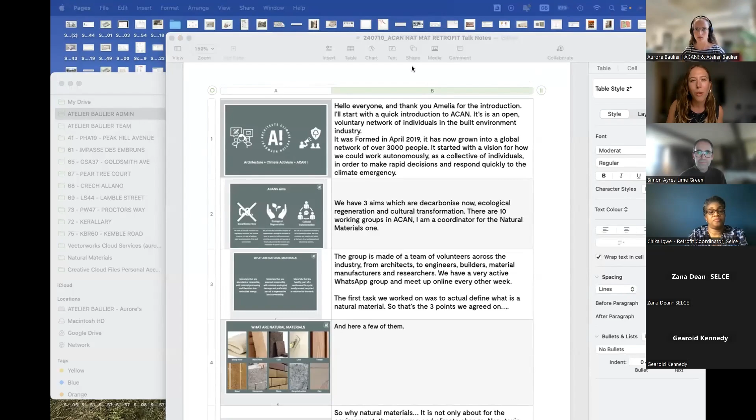Thank you so much, Aurore. Thank you. Okay, let me share. Okay, so here we go. Yes, you can all see this. Yeah. Okay, hello everyone. Thank you, Amelia. Aurore, sorry, just to let you know, you're sharing the widescreen and not the full screen one at the moment. No. Okay, let's try again. Sorry. That's all right. Is that working now? Perfect, yeah. Sorry about that. Okay, thank you, Amelia. And thank you everyone for joining us tonight.

So I'll start with a quick introduction to ACAN, which stands for Architects Climate Action Network. It is an open voluntary network of individuals in the built environment industry. It was formed in April 2019 and has now grown into a global network of over 3,000 people. And it started with a vision for how we could work autonomously as a collective of individuals in order to make rapid decisions and respond quickly to the climate emergency. We have 3 aims, which are decarbonize now, ecological regeneration, and cultural transformation.

There are 10 working groups in ACAN, and I'm a coordinator for the natural materials group. Our group is made of a team of volunteers from across industry, from architects to engineers, builders, material manufacturers, suppliers, researchers, and some homeowners as well. So we have a very active WhatsApp group with a lot of information being shared in there, and we're meeting up online every other week.

The first task we actually embarked on was to define what natural materials are, sometimes so-called bio-based materials. So those are the 3 lines we came up with. Natural materials are materials that are abundant or renewable with minimal processing and therefore low embodied energy. Materials that are also sourced responsibly with minimal ecological damage and preferably part of a regenerative land stewardship. And finally, materials that are healthy, part of a continuous life cycle, easily reused, recycled, or returned to the earth.

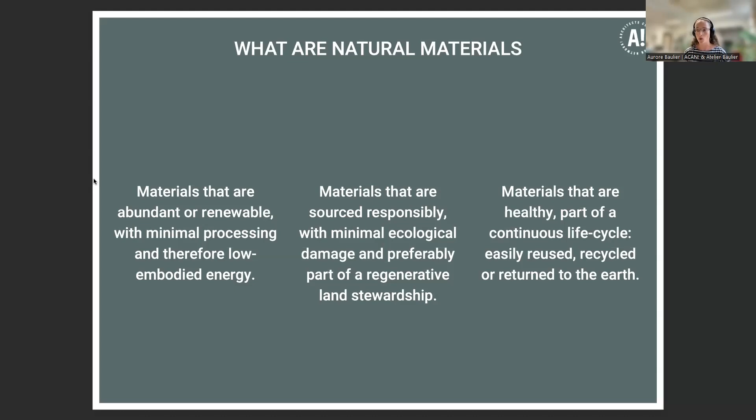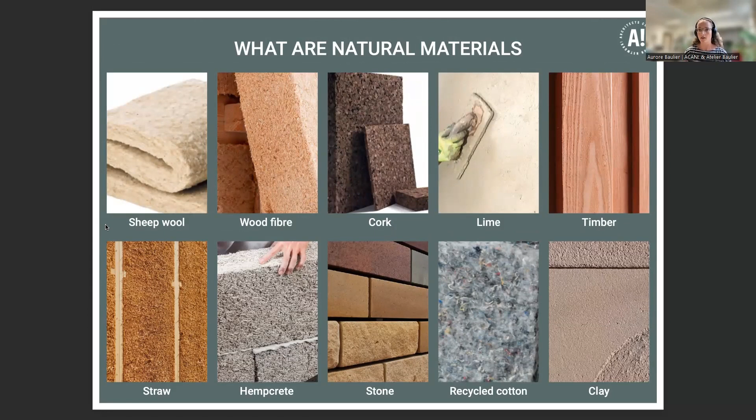And here you can see a few of them. Some of them might be obvious to you, so wool, timber, but also stone and clay and cork and straw you can see here on the bottom left. So why natural materials? It's not just about the environment, the use of the resource and climate change. Non-toxic materials are also beneficial to everyone along the chain, from the extraction to the manufacturing, installers, occupants of the building, and eventually the people who will be in charge of dismantling a building.

Health issues associated with the presence of harmful chemicals in our built environment have now been clearly identified. Some are called, for example, VOCs, the volatile organic compounds, and it has been demonstrated that the chemical presence in dwellings can actually impact the health of the inhabitants. It can be chemicals in vinyl floors that can impact people's hormones, but also generate respiratory issues.

So understanding the carbon cycle is key to bio-based materials. This illustration here shows you the different phases. Start with carbon storage. When a plant grows, it soaks up the CO2 from the environment and stores it inside. So when they are harvested to build a building, this carbon is sequestered until the end of life. And using those materials can also contribute to regenerative land management if attention is paid to where they come from and how they've been grown, which increases the carbon capture in soil and forest.

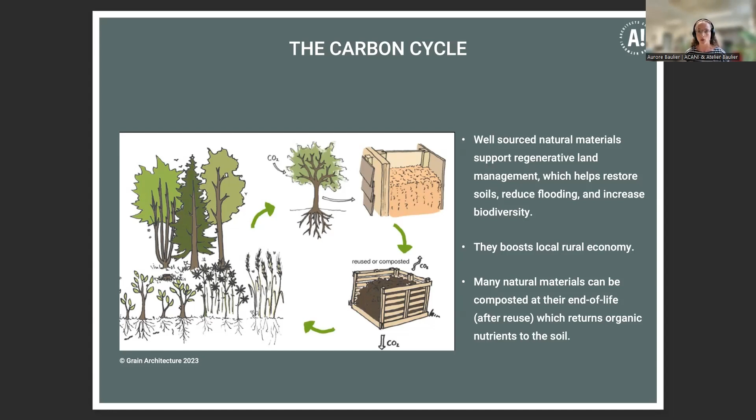It is also important to consider the end of life of a building when designing. Waste is a huge issue in the construction industry, and therefore the choice of material is key. For example, natural timber and wood fiber insulation can be composted, which helps return CO2 and nutrients to the soil, feeding new growth and completing the material cycle.

Here we have the illustration of the carbon footprint of various insulation materials. At the top of the graph, going towards the right, you've got material that requires a lot of processing and extraction to be made. So they are basically petroleum-based and mineral-based insulation, the one commonly seen on site like expanded foam materials. And then at the bottom of the graph, you see the little line going the other way. That's where carbon is being stored.

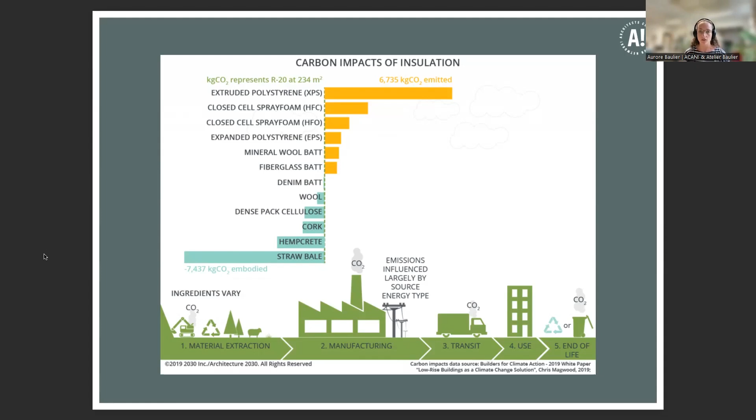Straw, for example, is brilliant, and hemp the same way, because they are plants that grow really fast and you can harvest every year in the same field, potentially, and store the carbon in buildings. It's worth noting as well that PIR, which is like plastic foam, and other petroleum-based and plastic-based materials usually end up being incinerated at the end of their life or in landfill, releasing pollutants into the environment.

Looking now at retrofitting. This is a house most of you would be quite familiar with, a solid masonry house in the UK, solid bricks. It's worth noting that all building materials before the 20th century were actually natural materials and were vapor open, relying on drafts for the ventilation, keeping the building fabric healthy. And this is why when we're retrofitting, it is crucial to incorporate mechanical ventilation as part of the retrofit.

Retrofit plays a huge part in improving the performance of our buildings. However, we need to take into account the fact that our buildings were built not to have any insulation, so we need to understand that to make sure we're not doing anything detrimental to the building fabric. And natural materials work really well with old buildings because they have that flexibility and they are vapor open. That means that they are compatible with the building fabric and don't generate any damage to the existing building.

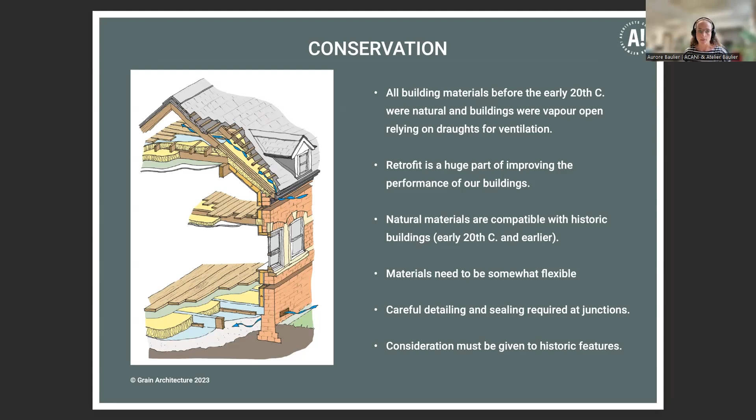Here on this graph, running really quickly into moisture. So back to when we talk about indoor quality and health, actually moisture has got a big part to play. Most of you would probably think that moisture control in a building is actually about keeping rain outside. However, this illustration here on the left shows that moisture is being generated inside the building as well. It's commonly agreed that each household generates about 7 liters of water per day. That is from breathing, laundry, boiling water for pasta, a cup of tea, whatever.

The graph on the right shows that there is actually an optimum relative humidity level that should be kept in a building to prevent health issues. And so managing moisture is a very important element. It's typically done via ventilation extraction. However, the choice of materials in your building will also have an impact, and I'm going to show you how

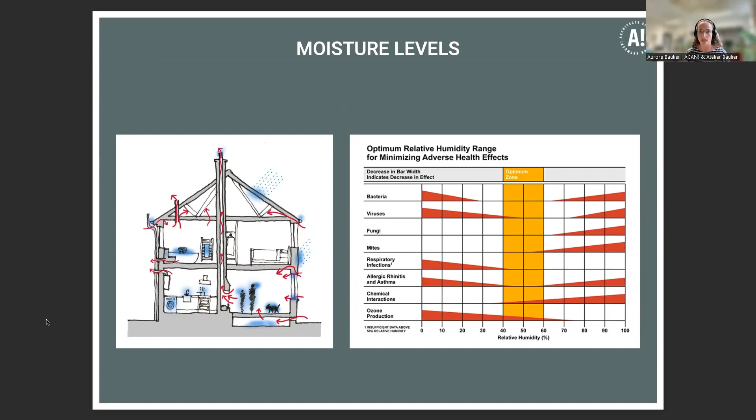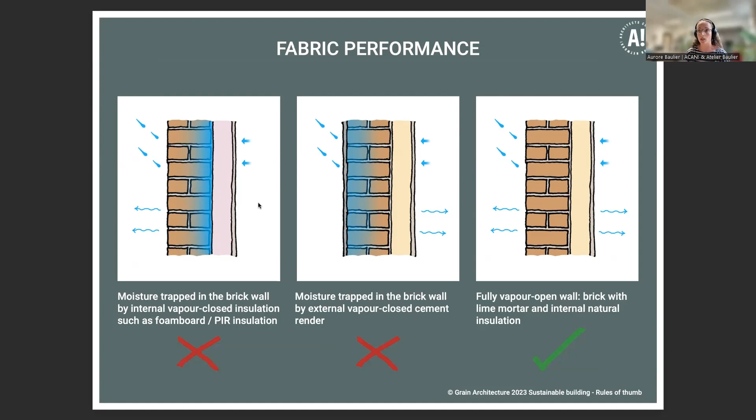So as you can see on the 2 drawings on the left, the vapor closed materials such as cement, plastic insulation, or plastic paint—it's worth noting that most internal emulsion paints are made up of 35% plastic, and exterior ones can be up to 75% plastic—those materials actually trap the moisture inside, creating issues for the building fabric, which will deteriorate over time.

So this page shows a comparison between 2 retrofits of a typical masonry wall in a house, one using conventional materials and the other one using natural materials. You can see that using natural materials doesn't mean good detailing isn't required. You can see here that all the reveals around the windows have been insulated and vapor membrane taped, and you have a continuity of the insulation. Things well done with suitable materials and a building well ventilated will ensure the longevity of the building and create a healthy, comfortable, and damp-free indoor environment.

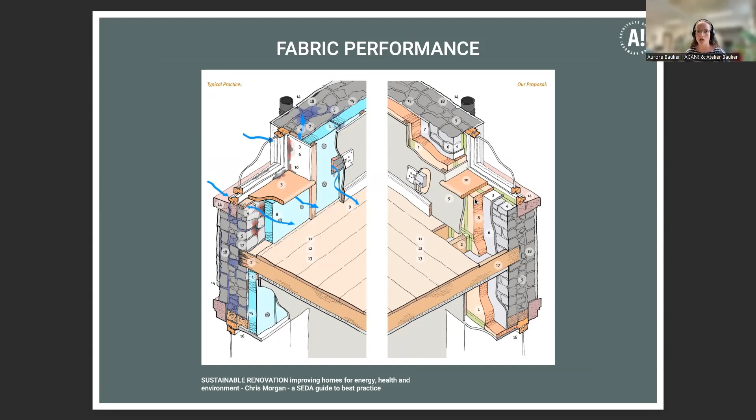And as you can see here, plastic and vapor-closed materials will tend to encourage condensation and trap moisture within the fabric. This is where we see mold growing. Drafts and thermal bridging will also create cold surfaces internally, which again will foster condensation. And when we look at insulation such as PIR, the rigid plastic foams, these materials actually shrink over time. This means you will end up having gaps around the edges, forming thermal bypasses. So slightly springy natural materials such as hemp or wood fiber, snugly fitted between studs, won't move and will provide a durable insulation solution.

So now looking at a key graph that was released earlier in the year by the ASBP, the Alliance for Sustainable Building Products, which is about how much insulation you should aim for. This actually depends on your house, but Part L of the building regulations outlines a target of 0.30 watts per square meter Kelvin U value. It's a bit technical, but basically they say that we should target this line here, but there is an allowable zone that is actually at 0.70.

And when we look at the graph on the left, you see the non-insulated wall, and the minute you add 20 mil of wall insulation, the performance has doubled. The sweet spot seems to be about 60 mil, where you've got a good compromise between the performance of your wall and minimizing the risk of condensation on your existing masonry wall, which automatically becomes a bit colder on the other side of the insulation. It's worth noting that at 60 mil of insulation, you've reached 90% of the performance given by the target. And it is said that at about 40 millimeters of insulation, you save about 80% on your heating bills.

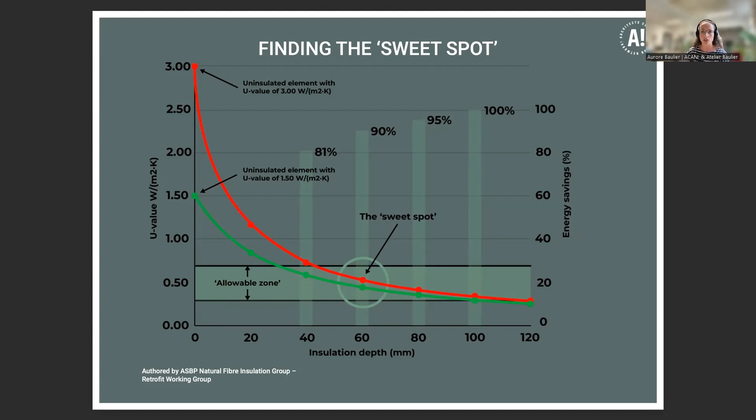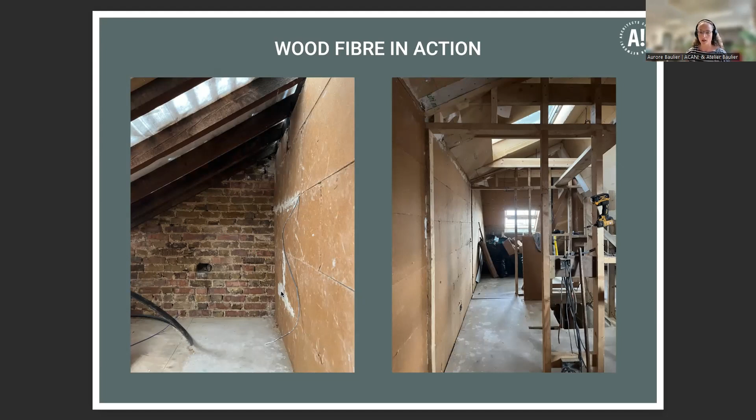Right, I tried to make that introduction quite brief, but I think it's really important to understand how and why using natural materials can help tackle the climate crisis and help being in control of our energy bills while improving the quality of our buildings. That is a project of mine that is on site at the minute, where we're insulating internally with wood fiber panels that would be rendered over with lime plaster supplied by Simon, actually.

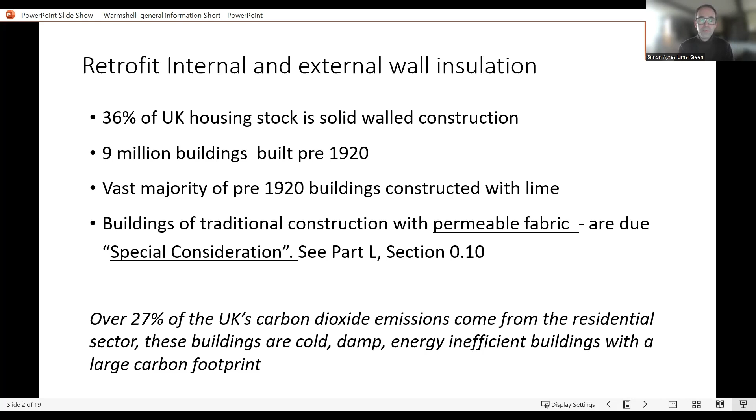so the ones we've just been learning about, the natural materials. Irrespective of whether you think natural materials are good for you because of low VOCs and all the other things, they are also technically the right thing according to the government's best practice guide and Part L for dealing with those solid wall buildings. And as it says there's an awful lot of carbon dioxide emitted from those buildings, and as many of you probably know, they are cold and damp and difficult to heat.

So going on to a little bit more of the nuts and bolts of designing internal and external wall insulation. Obviously, if you can fit external insulation, it's a better thing. External insulation goes on the outside of your walls and envelops the house like a tea cozy, and thereby gives you a better thermal performance for the same thickness of insulation, because you have fewer thermal bridges. I'll come on to that in a moment.

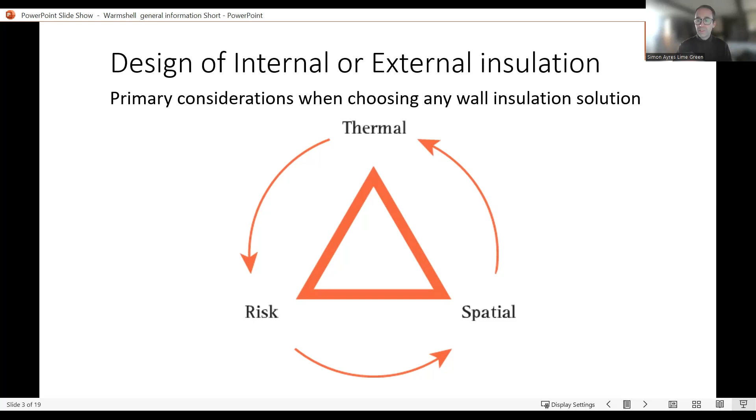So you've got to weigh up different things when deciding which one to do. Thermal performance obviously is important. How much space you're going to lose inside or out, how much space can you use? And then particularly with internal insulation, the risks, and the risks are principally to do with moisture. As we've just been learning, where does the moisture come from? Does the insulation material we are using trap it, or does it allow it to breathe out? So there are the three guiding principles.

So why insulate externally? I'm doing this in reverse, so excuse me. It's technically superior. Thermal bridges are the bits of wall which are difficult to insulate and which you can lose heat through. So it might be if your neighbour isn't insulated and you're semi-detached, it might be leaking a bit of heat through the join with your neighbour.

Another reason why external insulation is good for some people is because there's no loss of space on the inside. It also lowers the condensation risk or the moisture within the wall. That's because you've kind of got a new weatherproof front over your building. So if you've got an old building that needs improved protection against the weather, it offers a good thing.

Though it can be difficult to do because the building might be listed, or it might be in a conservation area, or there might be complex detailing. So you might have bay windows, decorative brickwork that you might want to keep, other features which make it difficult to add in external insulation, window sills, and so on and so forth. All those sort of things might be difficult to overcome.

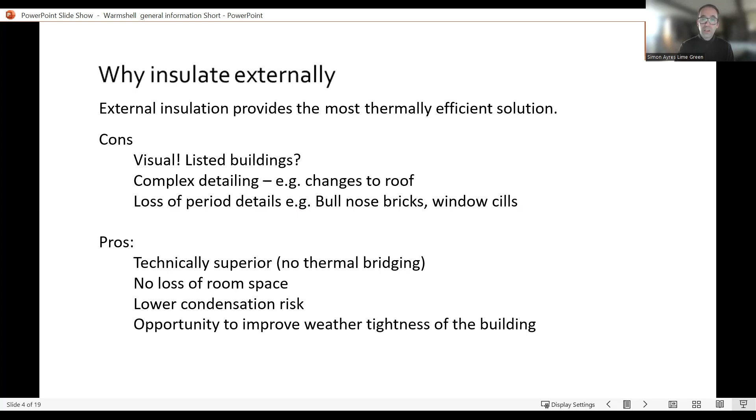Insulating internally, I'm going to do it in reverse again. So obviously you get to keep the external appearance of the property. It's generally a bit cheaper. And also that can be cheaper, and you can do it piecemeal, so you can do it room by room, whereas external you need to kind of do at least one elevation at a time.

There are, this might be slightly controversial, fewer specialist skills perhaps, because externally you need more people on site, more labour to do rendering in one swoop, so you get the whole thing done in one go. Whereas internally, you can be a little bit more piecemeal. You can have one or two people rather than a whole team.

Problems with internal insulation. Again, you've got detailing. So have you got decorative mouldings? Is it a Victorian property with decorative mouldings that you want to keep? Is the building made up of lots of additions over time, which make junctions difficult, that sort of thing? It's definitely riskier from a condensation point of view. So water vapour, as it goes through the wall, will condense and turn to liquid water. That liquid water is not a good thing around timber that will be embedded in the wall.

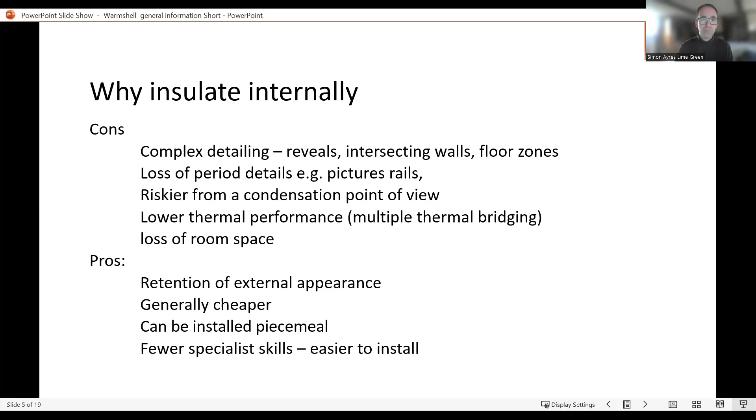I'll move on quickly because I realise we haven't got lots of time. Types of insulation, kind of been through this a little bit already. You've got your petrochemical, extruded, expanded type, mineral wool, foam glass, that sort of thing. Natural, as we just learned, wood fibre, flexible, rigid, straw, sheep's wool, and so on and so forth, hempcrete, and that sort of thing.

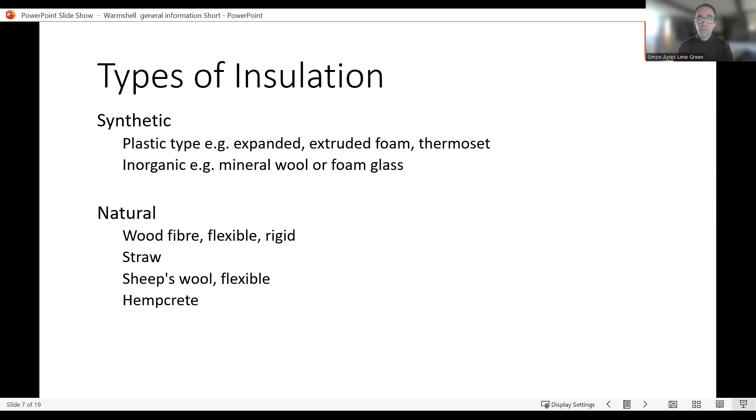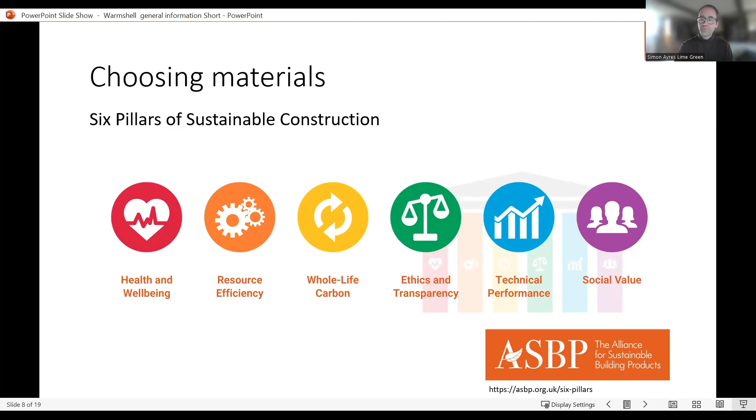We choose our materials on technical performance, as well as going with the ASBP, and there's a link there at the bottom to the ASBP, who have 6 pillars of sustainable construction. It's a little bit like the ACAN philosophy about not just choosing materials, say if it's an insulation material, just on the thermal performance alone. You choose it on all the other performances, technical, ethical, and all that kind of stuff. And this is why, because we don't think insulation provides just one role.

We think insulation provides multiple roles, 8 in fact: thermal, acoustic. So there are more and more studies now on background noise in buildings and how that affects people's health. And it has a significant effect on people's health in noisy environments. So acoustic is really important. Fire protection, naturally. Health, of course. So again, go back to VOCs and those sort of materials. You know, what is the material made from and what does it off-gas or otherwise?

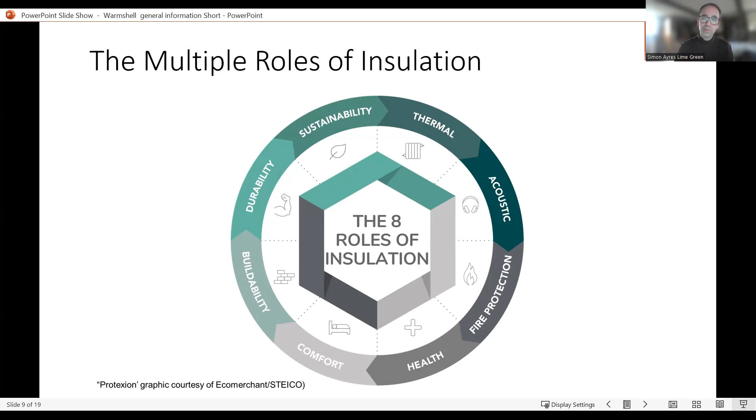Comfort. So it's slightly difficult to put numbers or figures on, but it's a combination of things like thermal, acoustic, moisture, that sort of thing. Buildability, how easy is it to use? Durability, we want materials to be durable and long lasting, done correctly. Some of the measures I'll show you in a moment are good for 25 years upwards easily, and sustainable, of course. So if we're using wood fibre, obviously it's something you can grow and it's from sustainable forests, that sort of stuff.

So natural insulations and moisture. We use wood fibre principally in our insulation systems, and that means they are breathable and moisture buffering. Not quite the same thing, but breathable is allowing water vapour to escape through a material. Moisture buffering is an insulation that might, sheep's wool is particularly good at this, and denser wood fibre. So its thermal performance will be unaffected at times of higher moisture loading, whereas other insulations really don't. Natural insulations also are very good with summer heat protection as well.

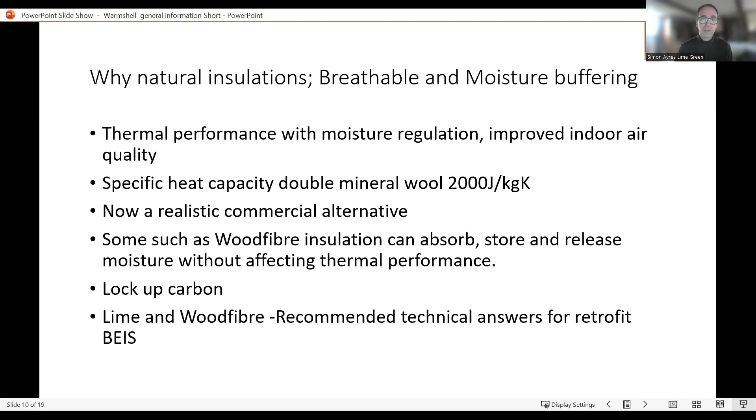So if you've ever been in an attic space that has been retrofitted with some more commonplace petrochemical or mineral wool insulations, you can overheat in the attic space quite quickly, whereas wood fibre doesn't. Of course, it also locks up carbon, which is a really important thing.

Very quick pyramid. It's a little bit like Aurore's one from earlier, but this is to achieve the same thermal performance. Which materials give off the most CO2 in their production? And you can see there, of course, the natural materials, wood fiber, straw and so on, are right at the bottom, and right at the top are the ones we'd expect to be there.

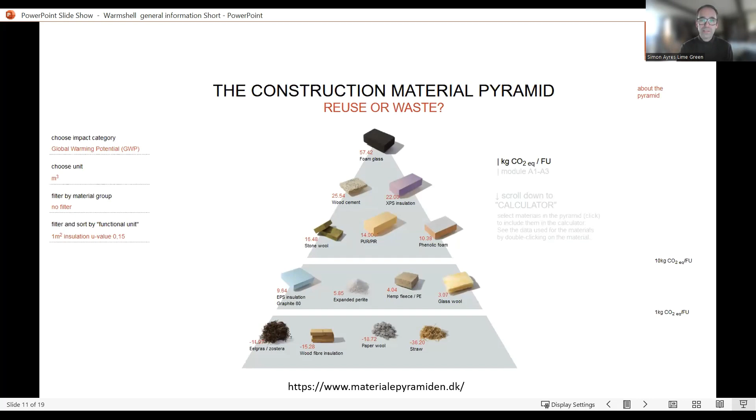So I'll just very quickly run through a few projects and just how the systems go together. So all the systems that we provide are given a lime plaster or lime render over the top to protect them. That lime render and lime plaster protects against impact, the weather if it's external, fire if it's external, and fire if it's inside, and obviously gives a surface to decorate.

So here we've got a project in Lambeth, and the building to the right is two new passive houses, and the building to the left is a retrofit Victorian property that has had internal insulation, and it's perfectly possible to mix and match internal and external on the same property. That's acceptable, and it's quite common for external insulation to go on the rear of a property, retain perhaps the Victorian facade on the front or what have you, and have internal insulation.

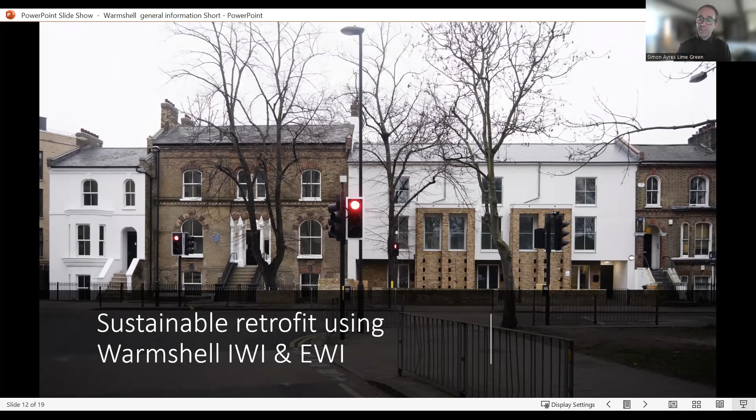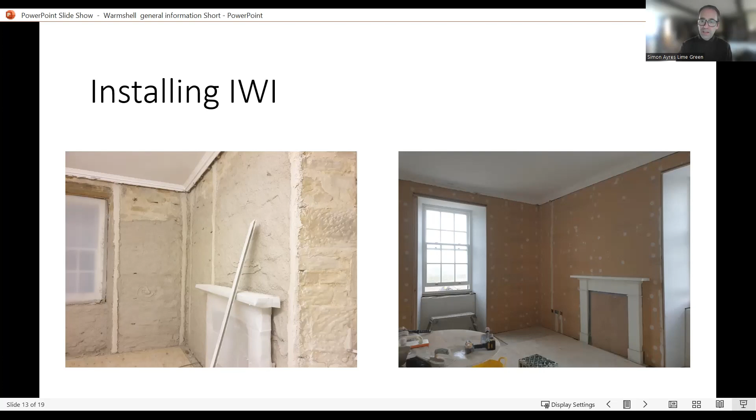There are no gaps. The boards are interlocking. They've got a tongue and groove, so it's really tight. No gaps, no junctions, that sort of thing. Any junctions with windows and doors, boards must be fitted tight. Insulation around the window reveals and between the floor zones. Plastered right up to the windows and doors, because that's the coolest bit of the wall, and it needs to be given really good attention.

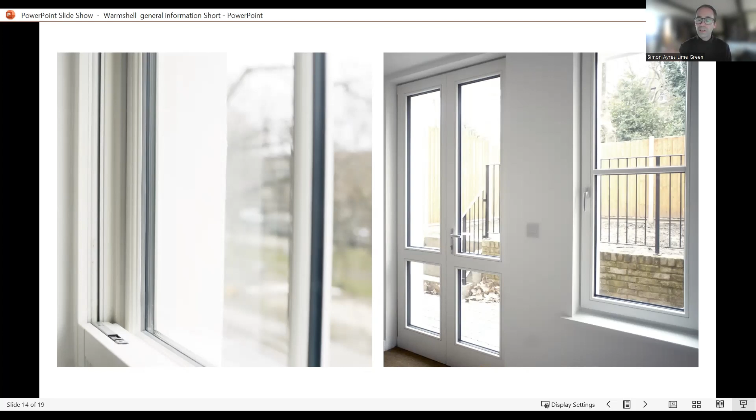We always say the detailing with internal wall insulation and external is really important. You might think adding a great big thick layer of insulation to your wall in general would be a good thing, but if you ignore the detailing, the floor zone, the window and door reveals, the bits that lead up to the windows and doors, then you are effectively wasting your efforts with that big thick slab of insulation on the main part of the wall, because the other bits will drag it back down and really reduce your efforts.

Here's slightly more. Again, it's a Victorian property with an extension, and this has been lime plastered and left unpainted. So it's a slightly more modern take on it. Lime plaster doesn't have to look old and weird. As in the last photograph, it can look just like normal plaster. It's perfectly easy to use. We've designed products which are designed to be used by normal plasterers rather than specialists. And as I say, there are only four components.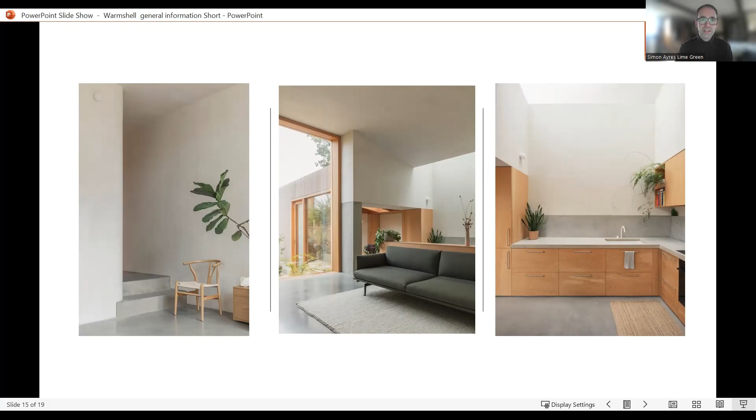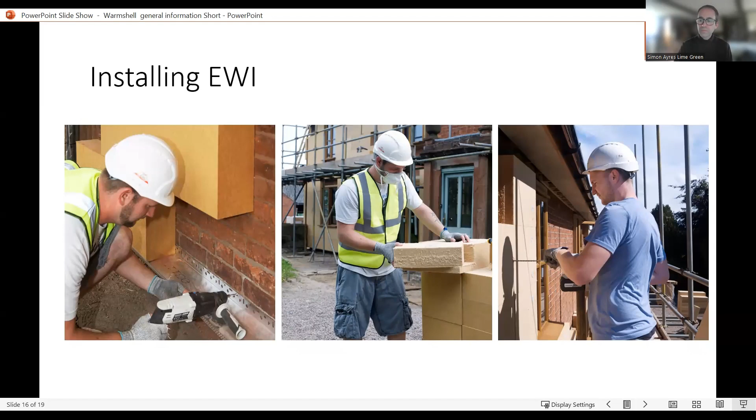Externally, slightly different, similar number of components, but the boards are fitted to the walls again in a sort of brick bond pattern. These are wood fiber boards, they're cut just like any other insulation, with woodworking tools and saws and that sort of thing. Externally, there are specific fixings that clamp the boards to the wall. And then there is a render system that goes over the top.

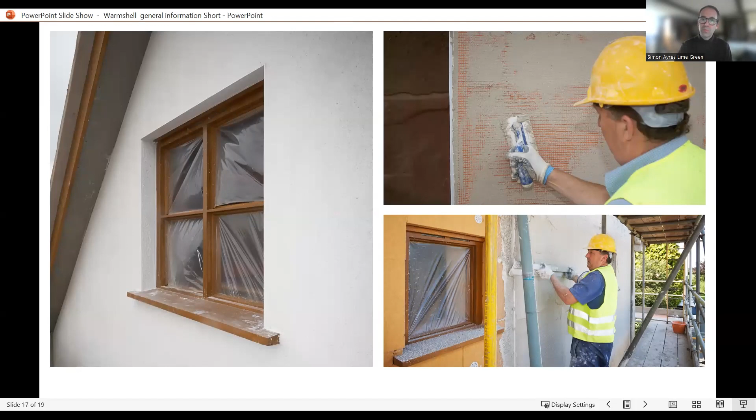We've got an undercoat with a reinforcing mesh, and that's the orange product at the top right. That's given another layer over the top, allowed to go off, and then finally coated with a lime render or a similar sort of product over the top to protect it against the weather. And that is me finished. Raced through that as quick as I can.

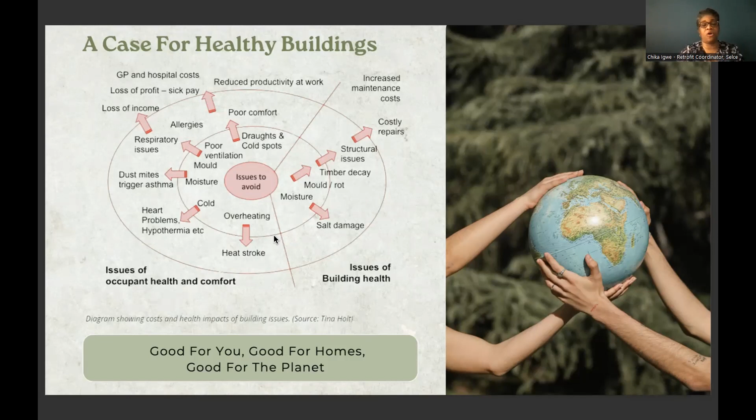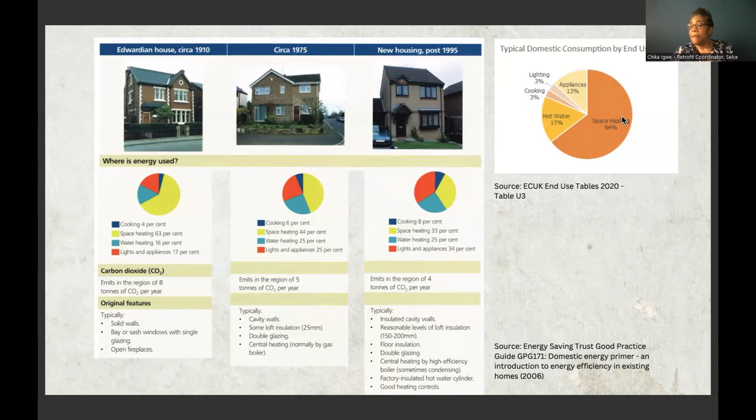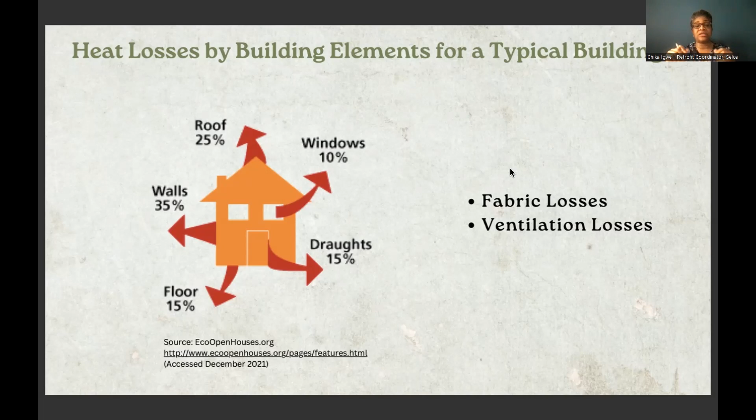Then there are ventilation losses that we can get through the windows. You can get them from drafts through the edges, corners, especially if they're not joined well.

So what do we do? At Future Fit Homes, we believe in a whole house approach. What that means is that it ensures that from the onset, every aspect of the building structure and how they interact with one another over time are taken into consideration to produce a phased plan. Then we say fabric first. The fabric first approach ensures that we tackle the biggest issues, like we identified in the previous slide, that it's really losing heat through the external structure, through the fabric.

And then finally, at the heart of what we do, we consider the current and future users. So that will be, for instance, how many people are in the house, how many people are expected in the house in future, like if it's a young couple and they're expecting to have more children. We also look at things like culture, because that will affect how the houses are used. So in places where there's a lot of gathering in the living spaces, maybe because of the culture, we make sure that we take them into consideration.

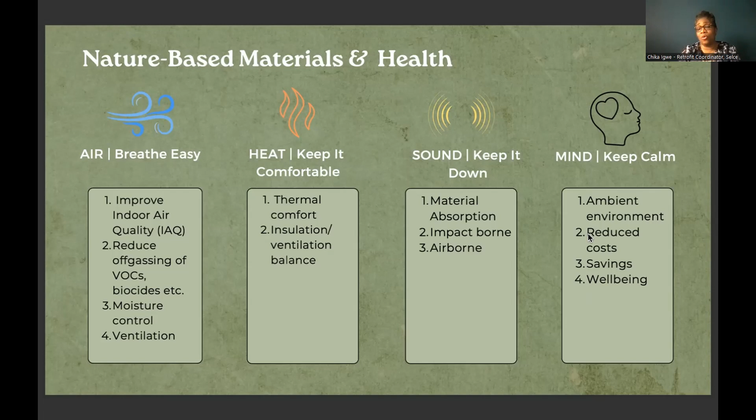And I'm looking at the time, I'll just round up very quickly. Of course, because heating demand is reduced, costs are reduced as well, which means there'll be savings. If there are fewer instances of having colds or flus in a cold property, that also reduces time lost to not working, or loss of earnings. So generally, it helps with well-being.